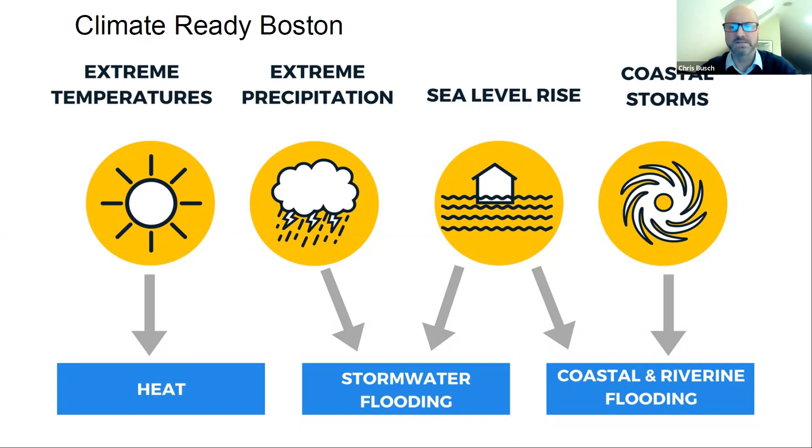To start, a lot of our resilience work that we've been conducting in BPDA has really been sourced through Climate Ready Boston, which serves as the citywide resilience and preparedness plan. It really helped to define the primary climate hazards that we're going to be dealing with over time. I think most folks are familiar with these: increased heat and heat island impacts, increase in precipitation and stormwater flooding, as well as increases in sea level rise and coastal storms and coastal flood events.

A very important aspect of Climate Ready was the integrated vulnerability assessment. Through this, we learned that some of the most impactful climate hazards are going to be associated with coastal flooding and sea level rise. By 2030, we're expecting around 9 inches of sea level rise with fairly substantial impacts on residents and buildings. Potentially around 10% of the city could be inundated with a major storm event.

And then really exponentially increasing by 2070 and beyond, we're expecting around 40 inches of sea level rise by then. Potential economic losses from a single major storm event could be upwards of $15 billion.

Another important component of Climate Ready is the Resilience Initiative section, which gets into the types of policies and standards that the city needs to be developing to reduce vulnerability and risk to those hazards. Through this, we learned that over 75% of economic losses are going to be associated with structural damage, content loss, and displacement. So one of the primary scales of resilience we've been working at is adapted buildings.

Since the BPDA administers city planning as well as development and design review, we also are involved with zoning policy. We've really been on point for advancing resilient building solutions.

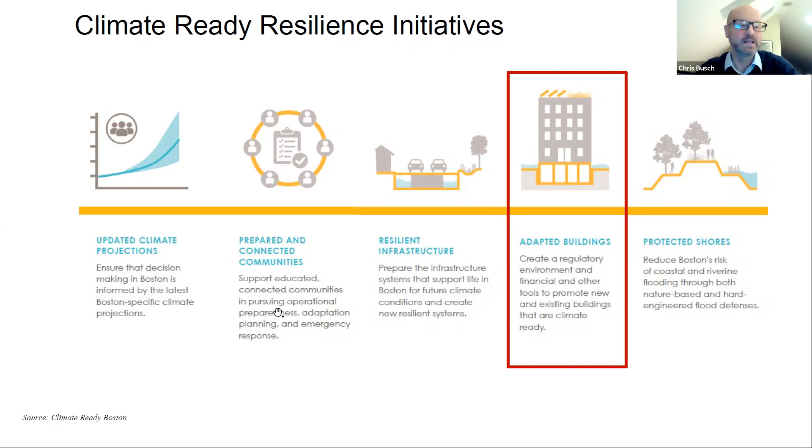The conceptual framework with much of these resilience strategies that the city is advancing, as we're looking to promote resilience at different scales, so we have this sort of reinforcement of resilience throughout Boston.

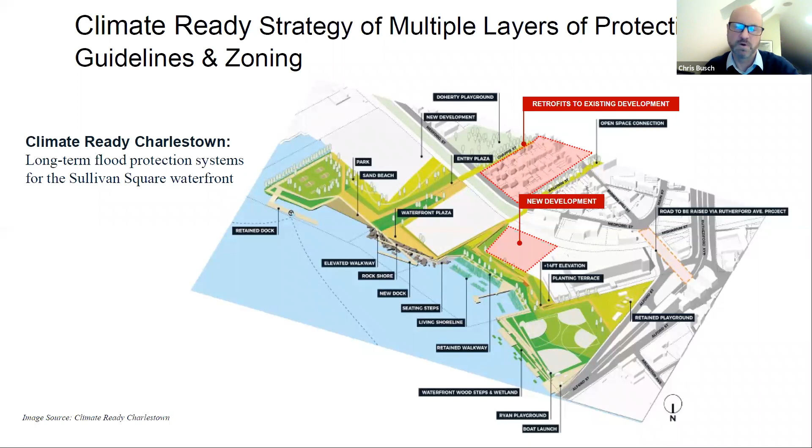So in our coastal areas, we've been looking at district scale interventions. The Environment Department's been great, leading a number of different projects in all of our waterfront neighborhoods, working with consultant teams and stakeholders as to what can be done along the shoreline to better prevent floodwaters from getting in. But we're also working at the site and building scale as well, which is where the guidelines and the zoning come into play.

Early on in this process, some of the objectives helped frame the path forward. Looking at zoning, it's in many ways in place to protect for life safety and prevent property damage. Given we've got this new threat and hazard analysis through Climate Ready, there's really a need to update our codes and standards to be more responsive to this new reality.

Also looking at our existing zoning codes to ensure we're not inhibiting resilient design and upgrades. I know with New York and post-Sandy, there were a number of issues they had with their zoning, trying to allow for resilient upgrades to rebuild many areas of the city. So we try to avoid that.

And also looking at specific zoning definitions, dimensional use standards that may need to be revised or created to facilitate resilience best practice. With the guidelines, really to provide a resource that translates a lot of resilience strategies into understandable best practices for construction as well as retrofits.

Also having it very relatable to the Boston context. I know FEMA has a fair amount of good resources for flood prevention, design, and measures, but they're very, I guess, suburban in nature. So we wanted to ensure the guidelines are really responsive to the Boston building fabric, and also having a good tool that could be utilized and administered within the overlay.

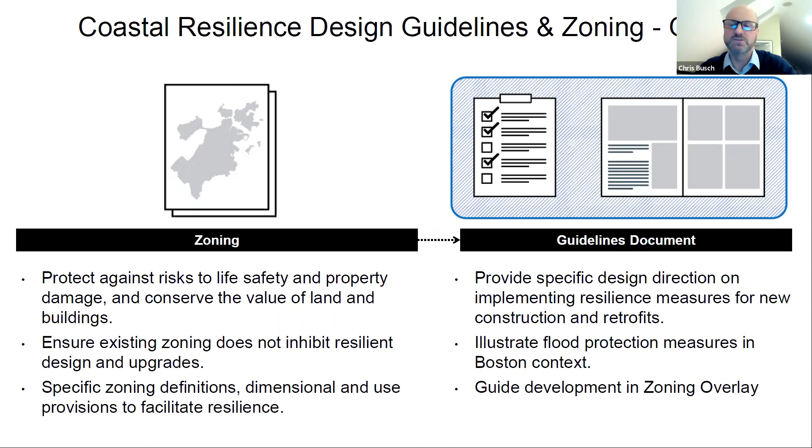In terms of process, we were able back in 2018 to get some grant funding through the state's Executive Office of Energy and Environmental Affairs and their Municipal Vulnerability Preparedness program to support this project. We hired a great consultant team comprising of Utile, Kleinfelder, Noble, Wickersham, and Heart. I think it was very helpful to have the legal disciplines working with the design and architectural practitioners to inform each other as we developed the zoning recommendations and the guidelines together.

Early on, we had a lot of good conversations with a number of city departments and agencies that deal with the urban and public realm. So conversations with our Landmarks Commission, Disabilities Commission, as well as code enforcement and our Parks Department.

We had a number of great focus groups, really bringing in practitioners in design and architecture, as well as members of the development community and legal land use, just to help inform the process. And then we had a number of great community forums out in the neighborhoods within this overlay, just to discuss vulnerability and ensure that what was being developed through the guidelines was understandable.

The legal team really dug into a lot of national and regional precedents and best practices out there with resilience regulations, and looked into potential conflicts with our existing code and relationships to Article 80, which is the development review component of our zoning. Through the design guidelines, we looked again at a lot of best practice that's already out there, local and national level, and what FEMA has in place.

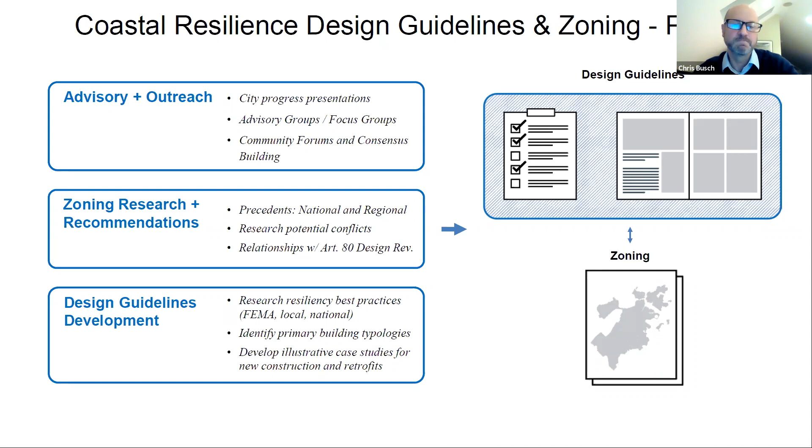And digging into the Boston context and Boston typologies, we walked through some of the primary components of the guidelines. We developed these resilient design principles, which are also referenced in the zoning, but looking at the guidelines as an organic document that we can update over time as new technologies and methodologies evolve.

Thinking about the public realm, so if we are elevating sites and finished floor elevations, thinking about how that interacts with and relates to existing open space and streetscapes. Also, relationship to these district scale or larger shoreline flood protection measures.

And also thinking about co-benefits. So are there opportunities with retrofits or upgrades for mitigation of heat island, improving energy efficiency, and meeting broader objectives of the city being carbon neutral by 2050.

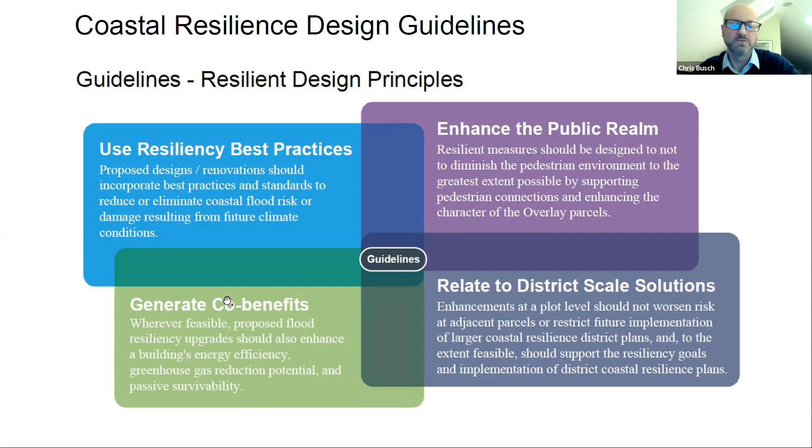Within the guidelines, we've got a resilience toolkit. Really, this is what I think much of the guidelines is all about, just sort of framing these different types of strategies that can be implemented for different types of projects.

The sections address building form, building envelope, issues like site access and adaptability, such as floodproofing measures, and also other supporting strategies that relate to landscaping and on-site energy.

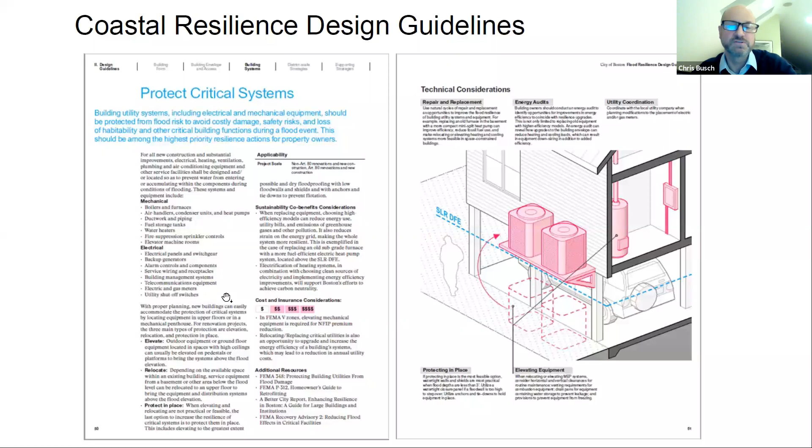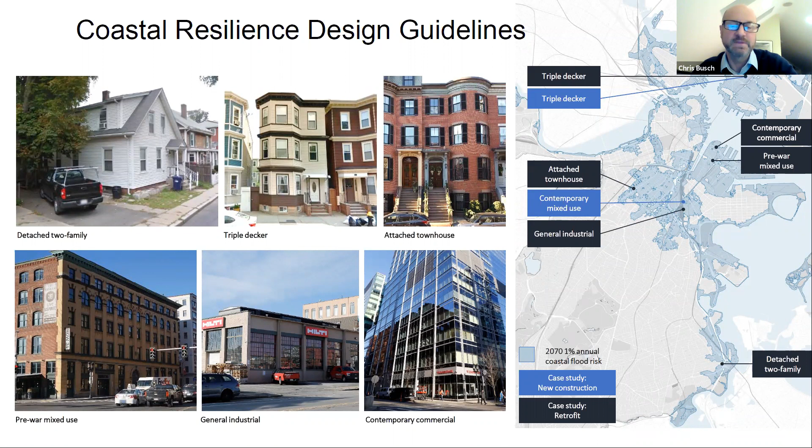So with each of these, they include a fairly detailed description, as well as good information on technical design and cost considerations. We also developed a number of case studies, looking at some of the primary building typologies within these new flood extents, and developed spreads looking at existing conditions with these building types, existing considerations, and how these flood prevention measures can be implemented in an incremental fashion or more holistically with a complete rebuild.

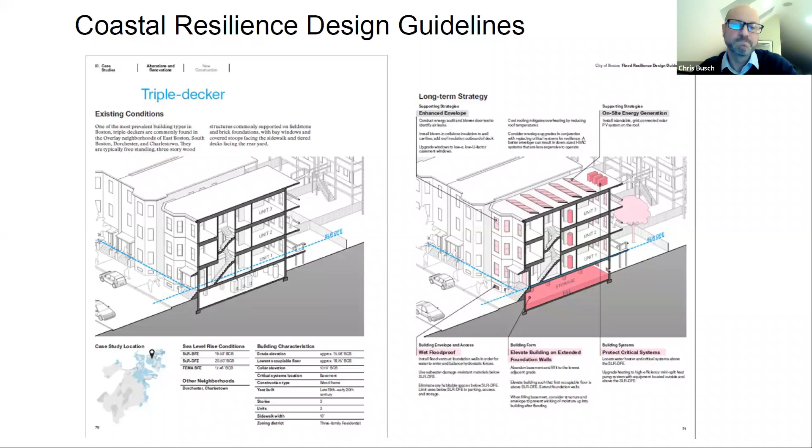And the transition into the zoning - some of this deck material is from public meetings we had in January. So many of you are probably familiar with what zoning is or isn't, but just a brief overview: the intent of code is to preserve health and ensure an orderly pattern of development. It also gets into dimensional standards and use components, and zoning really looks to implement, in most cases, broader planning and policy considerations.

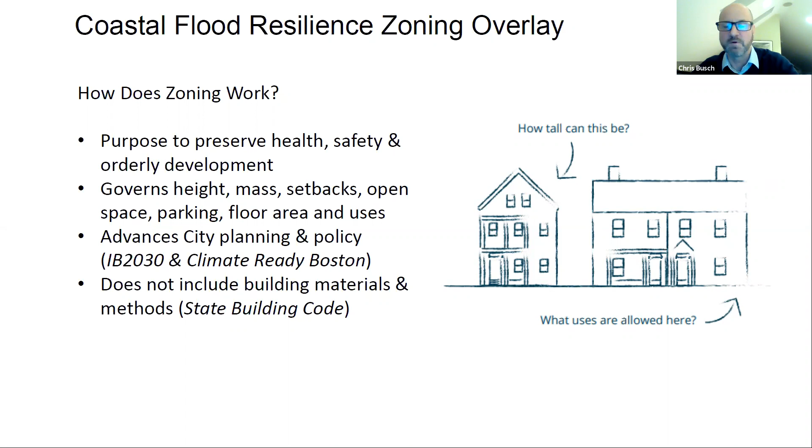So in this case, a lot of this has evolved out of Imagine Boston 2030 and Climate Ready Boston. And just differentiating between zoning and building code, getting into really the realm of materials and methods.

That code within Boston is administered by our Inspectional Services Department as well as zoning code. And overlays are manifestations of our zoning that can cover a single or multiple zoning districts or neighborhood districts and base zoning. Generally, overlays are more restrictive than the underlying zoning and advance land use and design policies.

We do have a number of existing overlays within Boston related to issues such as groundwater conservation, green belts, urban agriculture. We should note we already have a flood hazard overlay under Article 25 of our code, but this is specific to the National Flood Insurance Program and FEMA's flood insurance rate maps.

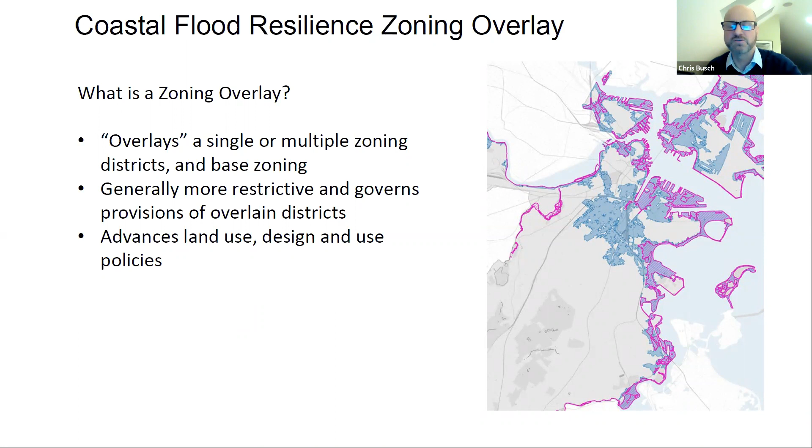These flood maps are represented by the purple areas you can see on this map image. These FEMA maps are developed based upon historic storms of record, so they do not incorporate sea level rise or future storm dynamics. So with these future flood extents that developed out of Climate Ready, with the benefit of the Boston Harbor flood risk model, we think it's prudent to expand this regulatory area and level of higher flood protection standards to a broader spectrum based upon that modeling.

So just to walk through some of the primary components of the overlay, it's Article 25A. We should note, over the past year, we've had the benefit of a legal or zoning consultant working with us to translate a lot of those recommendations into the actual draft language.

Purpose and objectives is usually the first component of most all zoning articles, again reiterating these design principles that are embodied within the guidelines. We should note that the guidelines are not incorporated into the zoning - they're there by reference. But we wanted to leave the guidelines outside of the zoning so we could update those in a more nimble fashion, rather than having to go back to our zoning commission every time we want to tweak or update those guidelines.

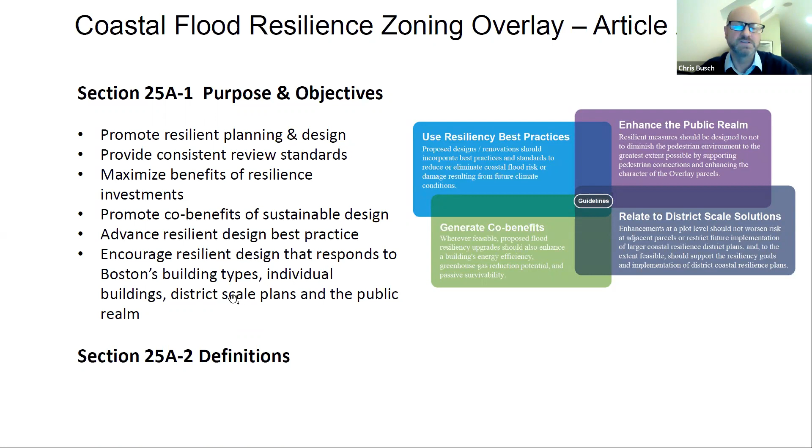There's a definition section, and I think most of the definitions I'll be getting into in the coming slides here. With any zoning overlay, we need to have a map, so that'll be embodied in Appendix A.

The areas of the overlay will extend to areas of the city, developed through the Boston Harbor flood risk model, that we would expect to see seawater inundation with a major storm event, which is termed a 1% chance event. Fairly rare event, but we had two events in 2018 you may recall, in January and March, which came very close to that 1% threshold.

And with the 2070 sea level rise dimension as well, we also have that built in. So 40 inches of sea level rise is a scale of sea level rise we anticipate somewhere between 2070 and 2100 - so really well within the usable lifespan of most buildings that we are reviewing currently.

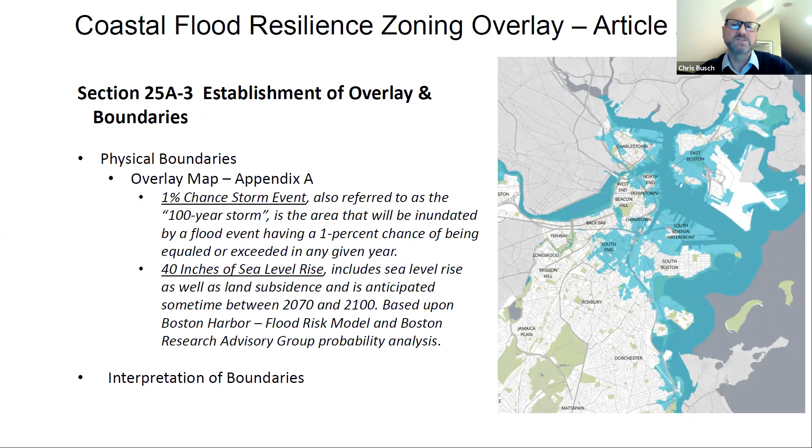There's a provision on interpretation of boundaries. So if a property owner has some question as to whether or not they are inside or outside of the zone, that would be determined by the Inspectional Services Department and the building commissioner, and that's consistent with Article 25.

With regard to applicability and what projects will be subject to the overlay, we're going to be capturing all projects that are subject to Article 80, large and small project review. So Article 80 is an aspect of our zoning where projects are reviewed by the BPDA and have to go to our board for authorization.

So the specific thresholds within Article 80, we are really embodying within the overlay. We determined that given the existing review procedures under Article 80 that are well-defined and transparent, that would be the most efficient and effective way to implement the goals of the overlay, rather than trying to develop new thresholds or conventions. So any new project comprising 20,000 square feet, or expansion of 20,000 square feet, will be subject.

We've got a tighter threshold of 10,000 square feet in our Harborpark district. These are areas of waterfront typically subject to the state's Tidelands Act, Chapter 91, in our downtown, Charlestown, South Boston, and Dorchester neighborhoods. And those Article 80 thresholds for additional units, change in use, and substantial rehabilitation, as you can see, would apply.

There'd be exemptions for projects. These are standard grandfathering provisions that we have in other aspects of our code. So for a project that would file for a building permit or for a variance with the Zoning Board of Appeal in advance of notice that we're going to the Zoning Commission for this overlay, those projects would be exempt.

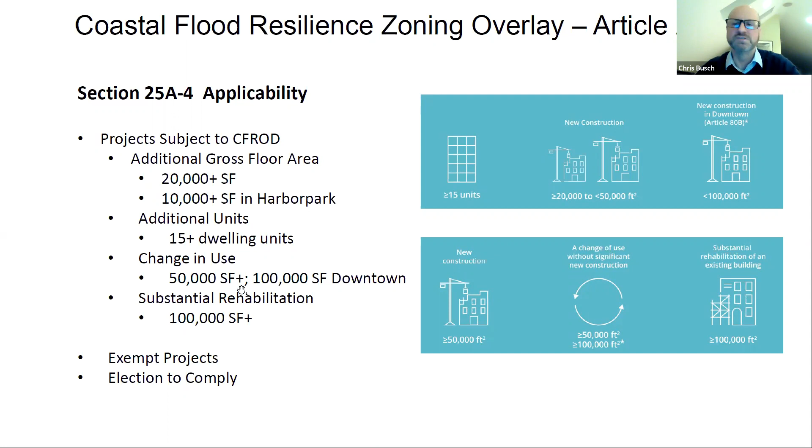We also have a provision for election to comply. So if there's a project that is smaller than 20,000 square feet or does not fit within the mechanics of Article 80, the proponent could undergo what we term resilience review, which I'll be getting into in a moment.

With respect to existing zoning, meaning our base zoning and neighborhood zoning, the more restrictive provisions of the overlay would prevail. That's consistent as well with our planned development areas, which are larger projects of an acre plus with more specific and refined zoning. Again, the more restrictive provisions of the overlay would rule the day, as well as for institutional master plans.

With respect to municipal harbor plans and designated port areas, these are really conventions of the state Tidelands Act, Chapter 91, so state regulations would prevail over local zoning in that case. However, our harbor plans are developed locally. They need to be authorized by the state, and usually the state secretary requires that if we have any dimensional or use components of those harbor plans, we need to codify them in our zoning. So I don't foresee many conflicts between our harbor plan and the overlay provisions.

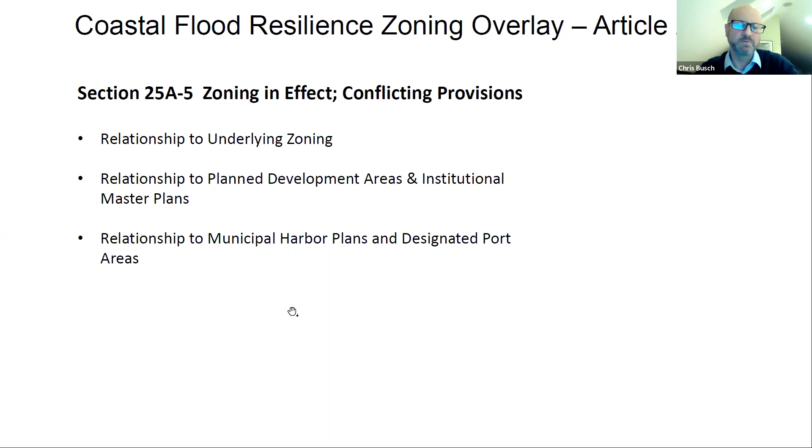Getting into use and dimensional regulations for essential facilities and high-risk structures - these types of uses are currently allowed within the overlay. They will become conditional to allow for a higher level of scrutiny. Typically these types of uses are hospitals, shelters, those types of uses, and would be framed within Article or Appendix C of the code. We'll also be establishing a minimum sea level rise design flood elevation.

This would be the minimum elevation of the lowest occupied floor for residential uses, or what's termed a dry flood proofing elevation for non-residential uses. Dry flood proofing would be incorporating materials that would keep floodwaters out of a structure.

We would also dimensionally establish a sea level rise design flood elevation. This would comprise of a sea level rise base flood elevation - the top of water elevation with that major storm event with 40 inches of sea level rise.

We already have these elevations through our zoning viewer. We've got a sea level rise flood hazard map component of our zoning viewer, so you could actually point and click on an actual parcel and see if you're in or outside of this future flood zone and what the top of water elevation is.

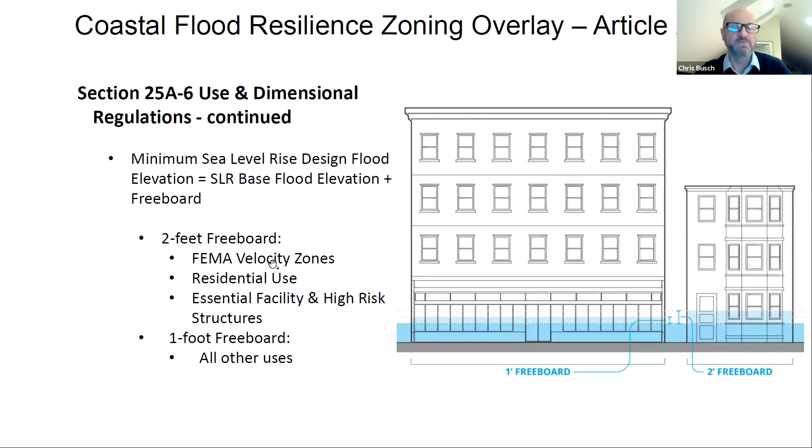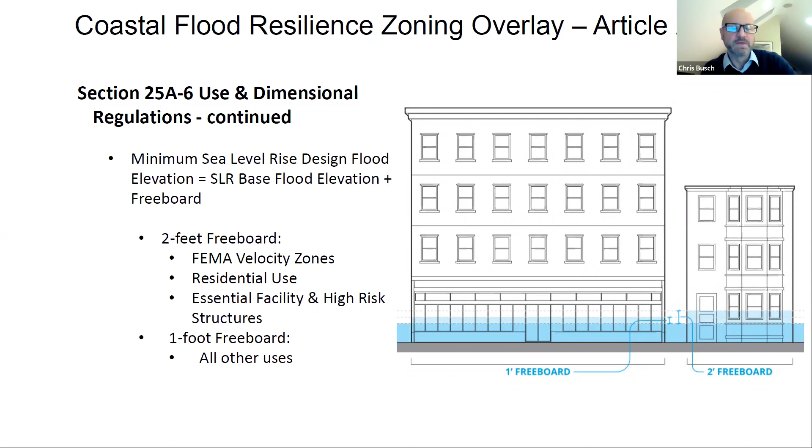There is also another dimension of a freeboard or margin of safety, which is really FEMA best practice. There'll be differing levels of freeboard based upon use and to some extent location. With FEMA velocity zones - areas right along the inner harbor and shoreline where we can have higher wave action and wave heights of 3 feet or more - there'd be a higher level of freeboard, as well as for more sensitive uses such as residential and the essential and high risk structures, and a 1 foot elevation of freeboard for other uses.

There are limitations on use beneath that design flood elevation. Again, this is consistent with existing FEMA standards, but for residential there'd be an allowance for stairs, ramps, lobbies - these sort of access and vertical circulation structures - flood prevention measures such as permanent or deployable flood barriers. Storage would be allowed, parking accessory to non-residential uses, and allowances for some temporary uses, typically retail or commercial in typology.

For non-residential uses that are currently allowed, they would become conditional, again to allow for a higher level of scrutiny of those uses beneath the flood elevation. And uses that are currently not allowed or conditional would remain forbidden.

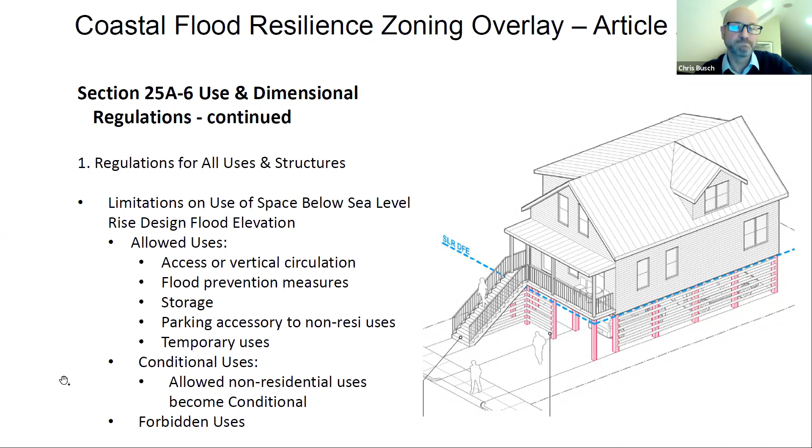Building height would be defined differently within this overlay. Currently, building height is measured from at grade. We've heard from property owners that have had an interest in elevating their site or building, and they oftentimes run into zoning height dimensions. So within the overlay, building height will be measured from the higher of grade or the sea level rise base flood elevation plus 2 feet, and that would apply for both residential as well as non-residential.

For larger sites where we have this dynamic - potentially in some areas grade being higher and other locations the base flood elevation plus 2 being lower - we're allowing for height to be measured from 5 feet above that base flood elevation.

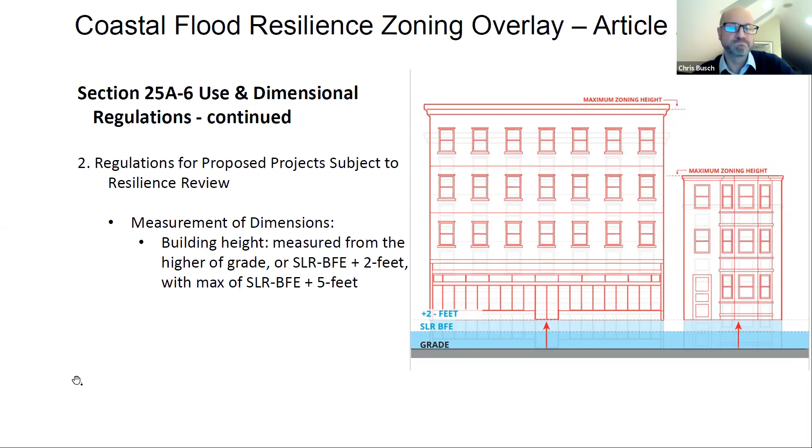Some of the other dimensional components we want to maintain through this are gross floor area and FARs. So there'd be exclusions for stairs and ramp structures. With the graphic in the upper right-hand corner from our guidelines, the areas in pink would not be considered part of the floor area calculation, as well as space needed for flood prevention measures.

Similarly for open space and lot coverage, there's an exclusion for vertical circulation structures, as well as if we need some type of structure for elevation of mechanical and sensitive utilities to ensure those are up and above that flood elevation.

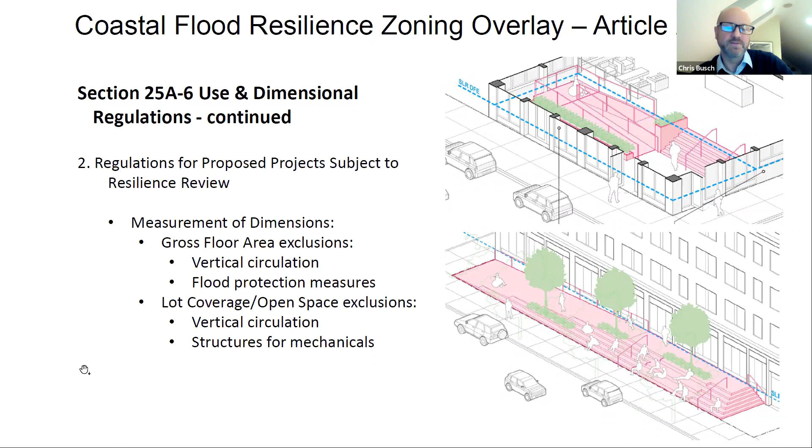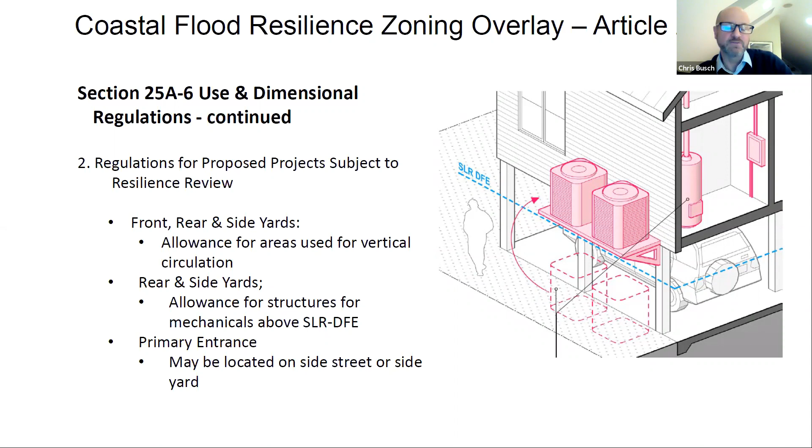Some of the other dimensional components for front, rear, and side yards: again, allowances for stairs and ramps if they need to be external to a building. With rear and side yards, also an allowance for elevated mechanicals. And in situations where we may have a very tight dimension of building frontage right up on a sidewalk or streetway, allowance for a primary entrance to be on a side yard or side street.

And lastly, resilience review. As part of the Article 80 large and small project review, there'd be a new component for resilience. Currently, projects undergoing our review need to address impacts on things like transportation, environmental impacts, wind, and shadow. So there'd be another new component related to resilience that would integrate the design guidelines and those design principles.

Just to note, we're going to be posting a position soon for a resilient review design staffer to conduct this. So for those out there with architectural and design backgrounds who may want to get more involved with this, we should be posting that within the next month or so.

Also, a number of appendices that I think we covered relating to the overlay map and definitions. And we will also be doing some tweaks to some of the existing zoning articles. So those special purpose overlay district provisions would be updated for the resilience overlay, and modifications to Article 80 for the resilient review component.

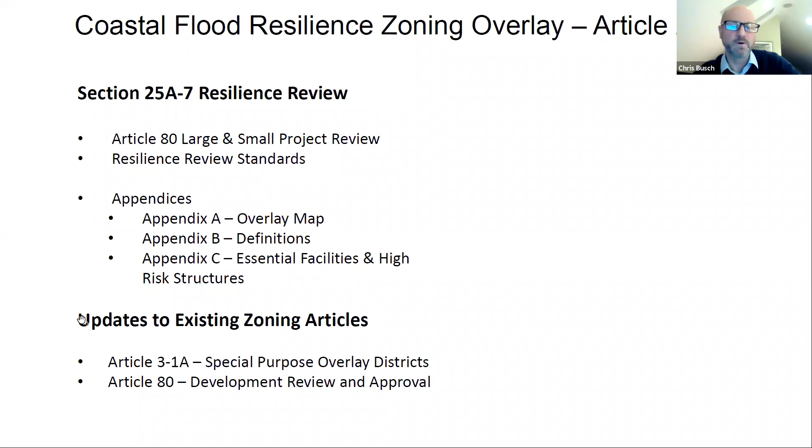In terms of process, we put the draft material out in mid-December. We held a couple of very well attended public meetings in January and are looking to receive comment by this Friday, February 12th. We'll be reviewing those comments and questions, making any necessary updates to the overlay, and then having a final version posted.

Beyond that, we would have to go to our board to request authorization to go to the zoning commission, and then as soon as a month after the board meeting, we could be before the zoning commission to promulgate the overlay.

So I think that about covers it from my end. I will stop the share and open it up for any questions, comments, thoughts people may have.

Thank you, Chris, very helpful. People can probably also raise their hands, and I can ask them to unmute themselves. We have Michelle, who has posted two questions in the chat. Michelle, do you want to go ahead and ask your question, then unmute yourself?

Well, technically no, because I'm eating, but yeah, when you were talking about the flood barriers, I just wondered, and maybe I missed it, if you include those sorts of barriers, are you liberated in the use for that lower level?